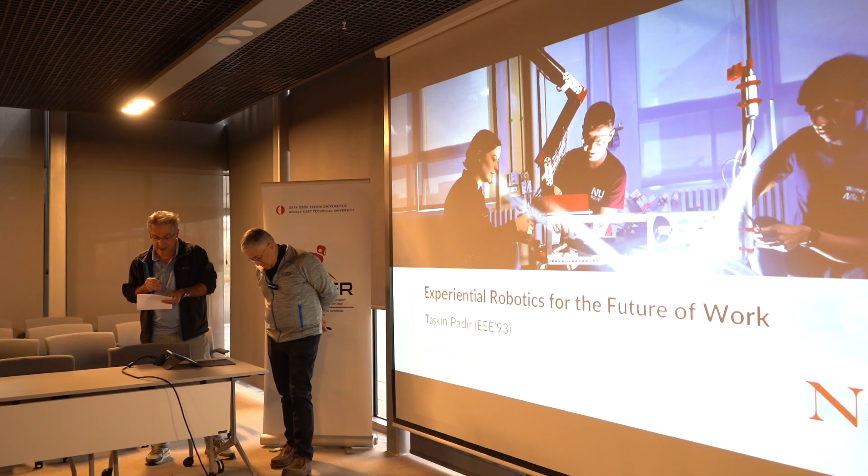Thank you so much, Errol. Sorry about the little hiccup we had before we started. This was long overdue. As Errol mentioned, I've been watching how ROMER was founded, and then it evolved, and it happened that I was around this week, and I'm delighted to be here and to talk about some of the work that we've done in the past decade and some. I also want to give you a projection to what I will be working on. Maybe that will inspire some new thoughts for you as well.

The title of the talk is Experiential Robotics for the Future of Work. As you age, your slides become more visuals, more videos, and your titles become more jazzy than technical, but I also have some deep dives that we want to go into.

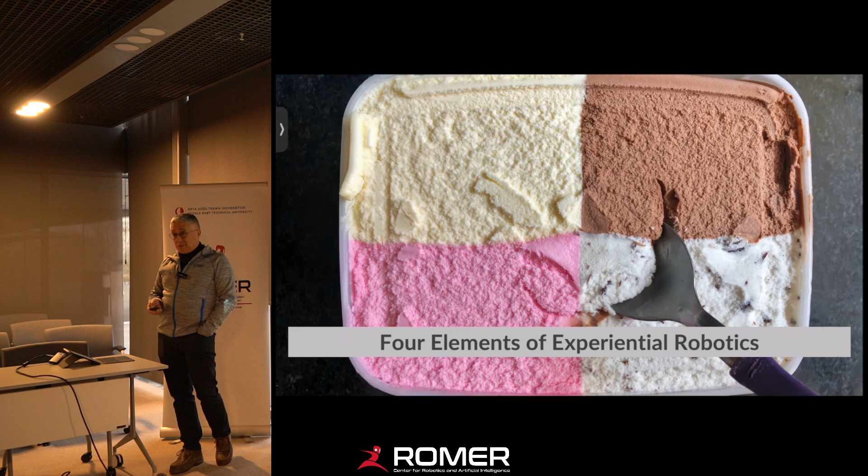Let me first address the elephant in the room. What is experiential robotics? This is a term that I've been using for more than 5 years now, and I describe it using 4 elements of experiential robotics. First, it's robotics to enhance human experiences at all aspects of life. We'll come back to some of the individuals that you see here, but whatever it takes, we design and develop robots to enhance human experiences. If a robot is not helpful for a human, why are we even working on it, right? So that's the first element of experiential robotics.

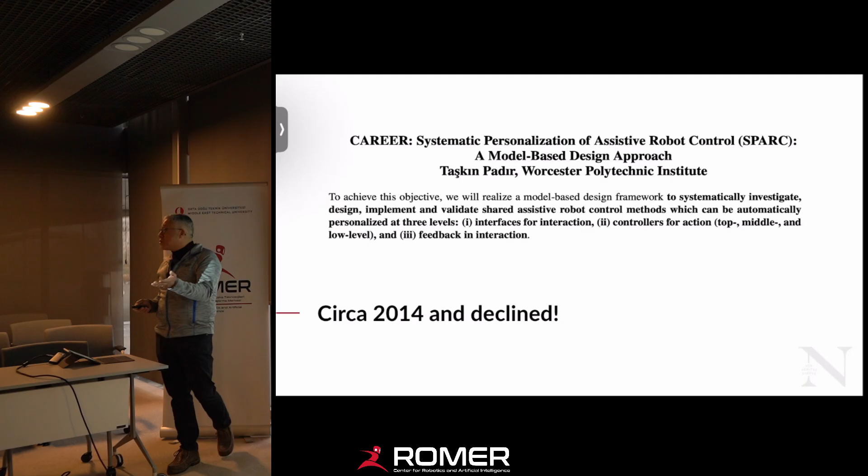The second element is you also see the age of the presenter if you put down your declined proposals on your slides, right? This was my career proposal to the National Science Foundation. I called it personalization of assistive robot control, about a little bit more than 10 years ago. The idea here was when you purchase your smartphone, the first thing you do is you start personalizing it, right? So there are no 2 phones that are exactly the same on the universe, in my opinion, correct? So we cannot design one robot that will fit all our needs, especially if we want to interact with those robots, if we want to collaborate with those robots, etc.

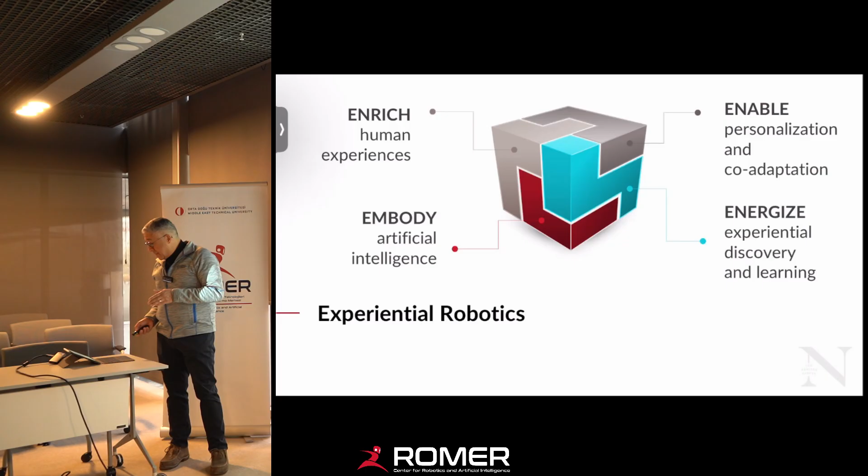Here's your summary. So experiential AI, experiential robotics, as a term I spun off again 5+ years ago. And then at Northeastern University, we launched our Institute for Experiential Robotics, very much similar to what ROMER is trying to do, providing an umbrella organization for our faculty, for our students. We have 5 areas of research that we put ourselves into, but at the center, how do we enrich the human experiences through meaningful deployment of robotics?

The first set of projects that I'm going to talk about, the title is Experiential Robotics for the Future of Work. So what is the future of work? Hopefully you'll get to see some of the elements. This is the CRISP project. We got this funded first from the Department of Defense in the U.S.

And then the National Science Foundation. In the U.S., you may not know this, there is a trade deficit in seafood, about $20 billion a year. So that means the U.S. buys more seafood than it sells, but that doesn't make sense because the U.S. is next to two big oceans.

There's Alaska where all the whitefish is caught. So when we dug deep into this problem, we realized that in Alaska, they catch metric tons of whitefish, it gets shipped to Asian countries for processing, they clean it, process it, and create these blocks of whitefish. Then the U.S. buys it back for McDonald's fish fillets and things like that. So that fish traveled far away and came back. It didn't make sense.

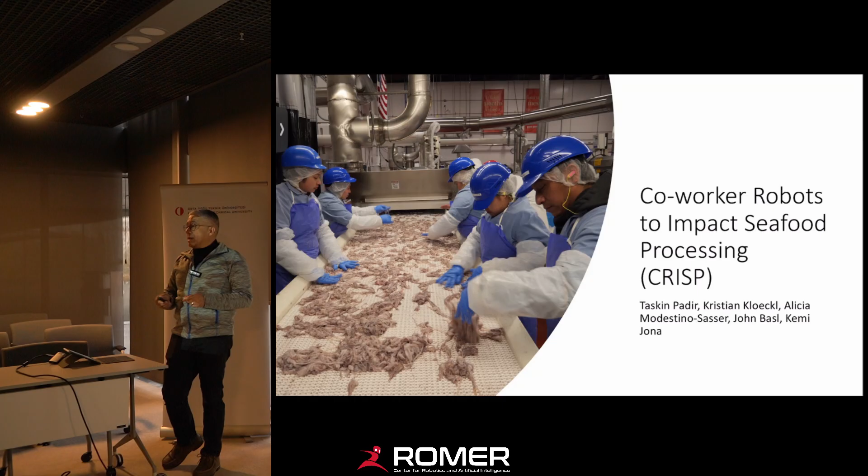So what we did was we took that problem and then we had a team. One thing I want to mention, I'm the only engineer in this team. We have an interaction design expert, a labor economics expert, an ethics expert, and a workforce development expert. Because in the U.S. you cannot just say we will introduce automation—everybody starts waving their hands asking, what about the jobs? So we had to look at the problem from all aspects.

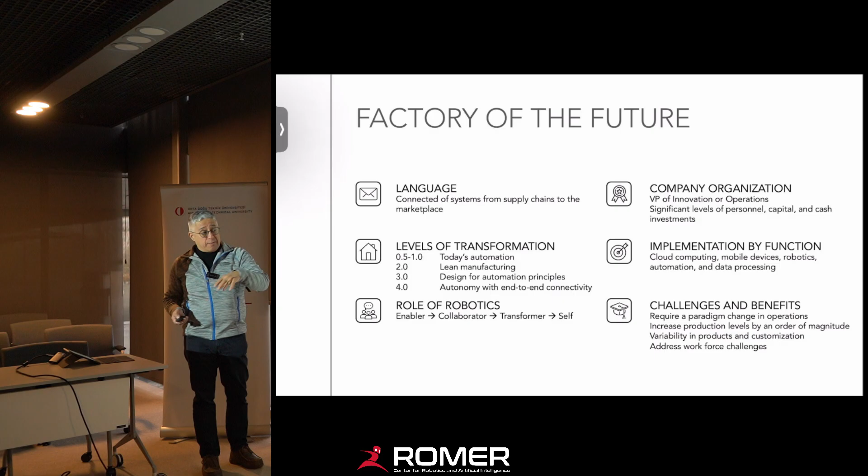We imagined this factory of the future. I don't want you to read the nitty-gritty details. This was during COVID, by the way, when we did this study. Things changed quite a bit at that point.

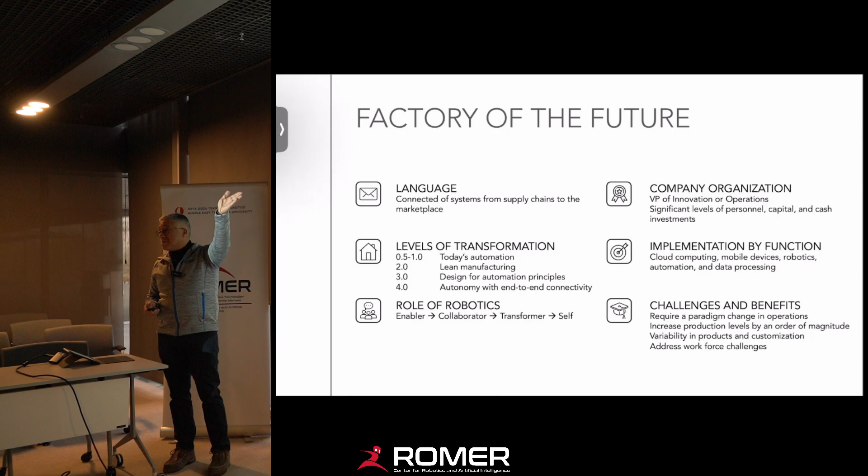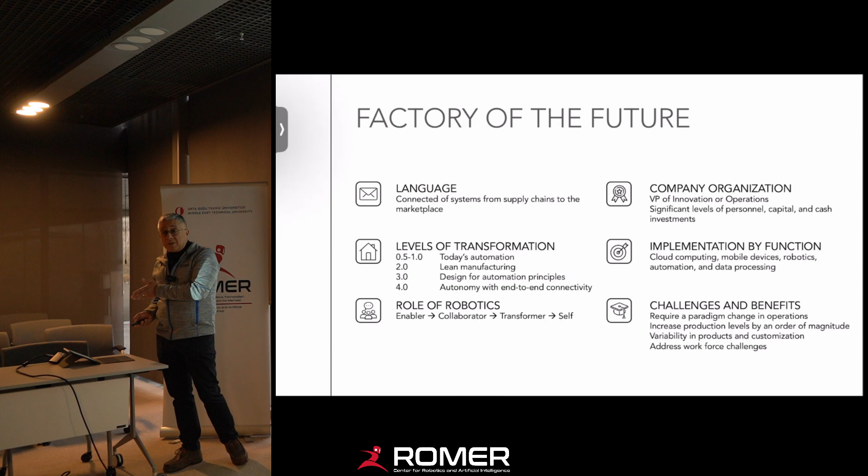One thing I want to point out is that we always talk about Industry 4.0, seafood Industry 4.0. We are probably right around this 1.0 level in many operations when it comes to these underserved industries. I'm sure if you go to any industrial region in Turkey, you'll find out that most of the things done there are very labor intensive—there's literally no technology. And in the U.S., one problem is the sustainability of operations because there's an aging population, and that one guy who knows how to do X is going to retire in the next 5 years, and then there's no one who knows how to do it.

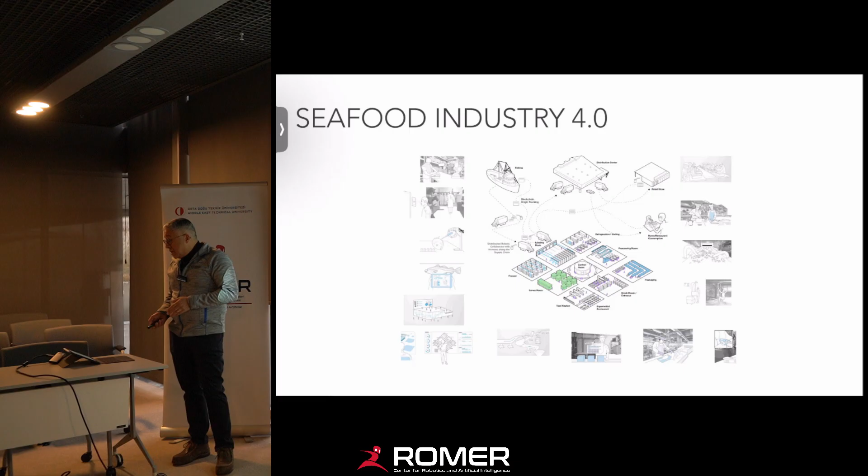So we created a roadmap, and then we saw things like this. I'll show you a few projects that we completed under this program. This is a seafood processing plant in Portland, Maine. It's a very small place. Workers all day long unbox these frozen fish, and then that frozen fish goes into a big machine where it gets defrosted just the right amount so they can process it, then freeze it and put it into market.

This is called added value, right? Sometimes added value is just portioning it because, guess what, Americans don't like to buy whole fish and clean it in their homes. They want to buy the little fillet and then process it. So then we asked the question, what can we do? This project we labeled 'productive inconvenience.' If your job is to move these 7.5 kilogram boxes all day long, you're prone to safety issues.

So you'll have injuries at the end of the day, the week, the month. So one idea is, can we introduce variability into the human-robot collaboration? That means you don't just go and pick up the box from the pallet—we have a collaborative robot arm that presents the box at a given region, but we played with that region. We said, okay, it can be assistive, right? Every one of us has our golden zone—I feel comfortable picking a box at this pose, but that also becomes a repetitive task, since I always go to that same location and position.

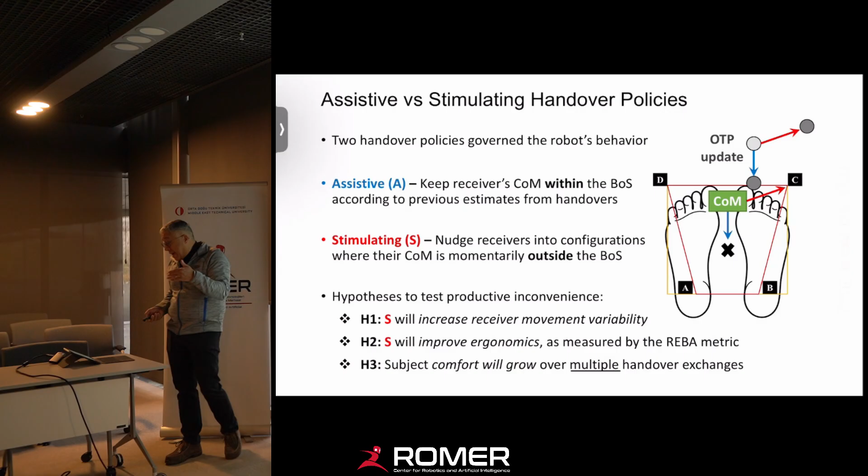So you're worrying—you have other worries. So this was, in a sense, asking can we introduce some stimulating motions for the workers so that they feel more engaged with the task, and then perhaps there's a path to minimize injuries. So we did this—again, during COVID, you can tell from my students, masks and all that.

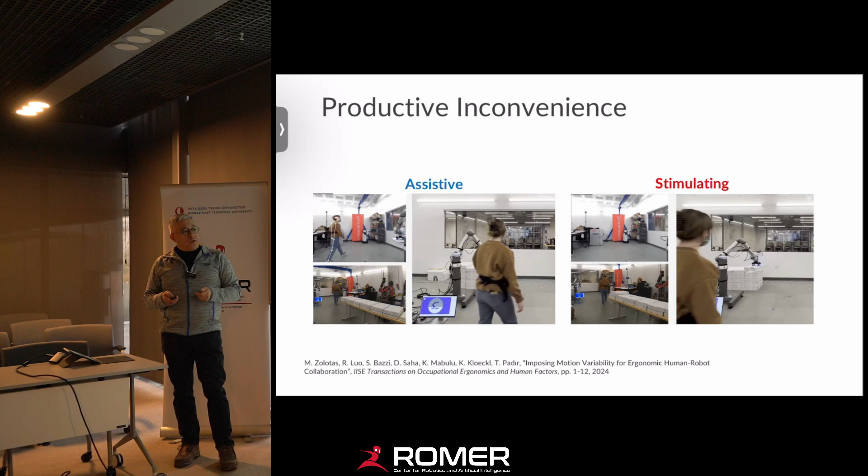During COVID, we completed this study, and then we looked at the assistive versus the stimulating conditions. Both videos look alike, but in the stimulating condition, we present the box outside of the polygon of support for the worker, so that person needs to do something a little different. In the other one, we track where the worker is standing and present the most ergonomic pose.

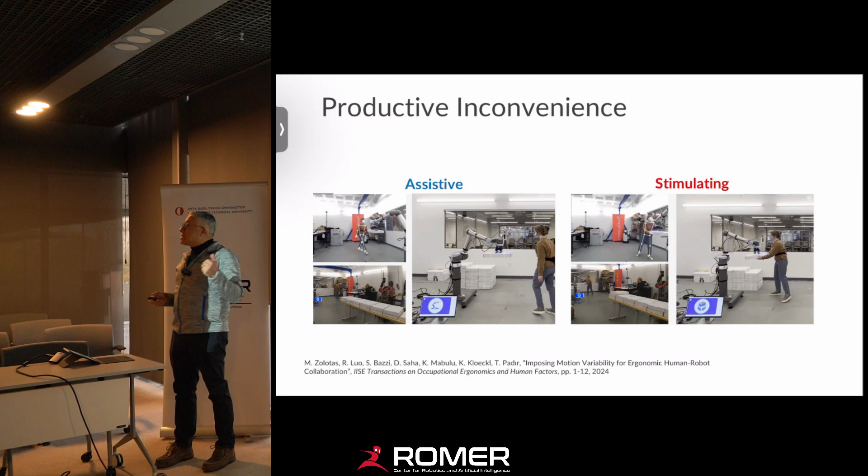I never thought during my PhD that I would write a paper in the Transactions on Occupational Ergonomics and Human Factors, but this is the power of multidisciplinary research. This is where we published this paper, and sure enough, our results from the human study showed that with the stimulating condition there were some advantages gained, and it was well received.

Okay, moving on. I'll bore you with seafood a little bit, but then we'll go into some of the other projects.

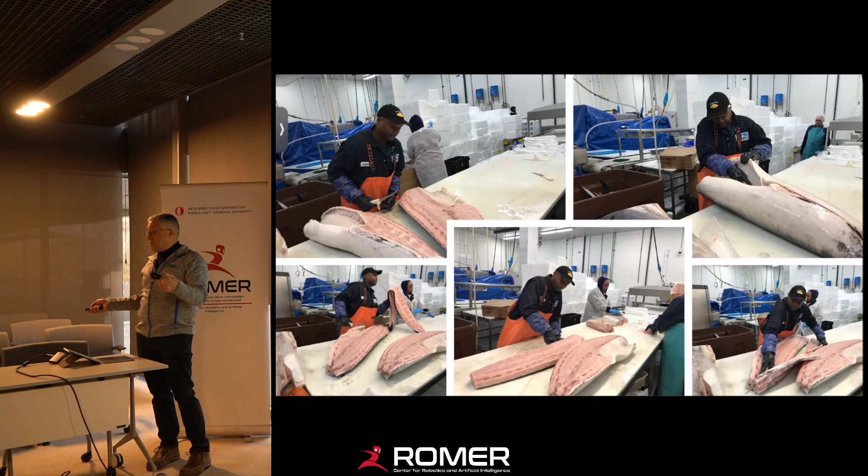We visited another place and saw this. This gentleman is pretty wealthy because he knows how to process a 275-pound swordfish or tuna fish. You may wonder, what about it? Every little bit of meat left on the bone or on the skin is waste from the company's perspective.

When these workers are trained—by the way, there aren't a lot of them—we heard, don't quote me on this, that it takes about 18 months for someone to get trained to do this right. There were only one or two people in the greater Boston area, and Boston is right on the ocean, so they cycle from company to company.

The idea here was, what if there was a robotic system around this—a coworker robot—not to replace this gentleman, because we know the challenges of robotics, but can we shave off a minute, 10 minutes, or half an hour through the collaboration? Can we help this worker do their job faster and quicker?

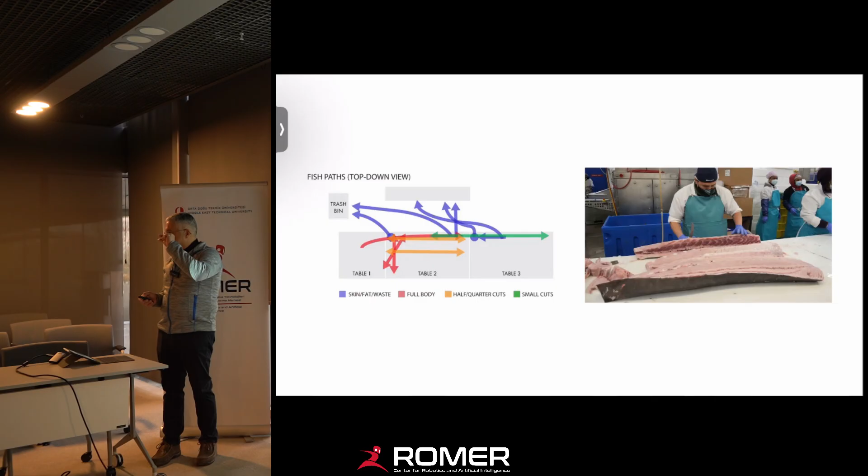So the interaction design piece came in. One of our experts looked at what they do—there are regions on the table, they first pull the big piece, make a big incision. I'm just giving you the idea, but we created a catalog of tasks: I push this big piece out, I'm done with this, it needs to go away. But every push, every touch is time on the worker's clock.

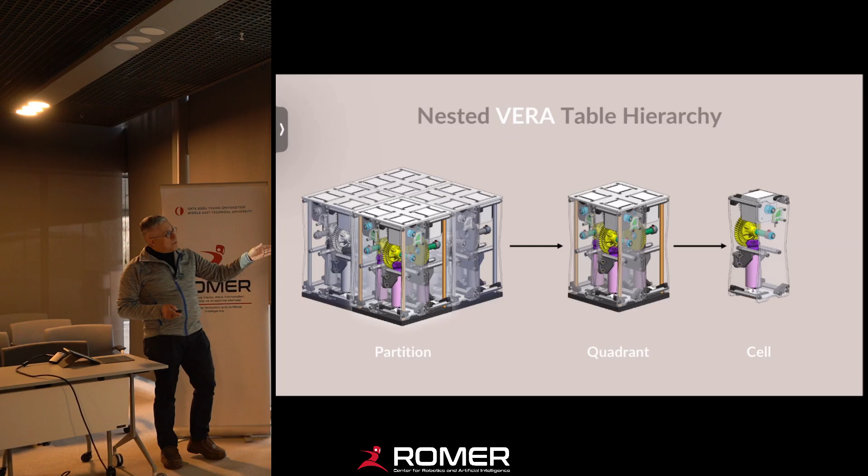So we said, what if there was a robot—not a robot arm, not a humanoid robot—what if the table itself is a robot? We created this concept of a voxel-enabled robotic assistant. Your tabletop is not a conveyor belt, because conveyor belts move in one dimension, maybe two, but you can't pack them into systems. In the prototype we did two 16-voxel tabletops, but it's modular, so you can go from 16s to 4s to 1s, in any form or shape.

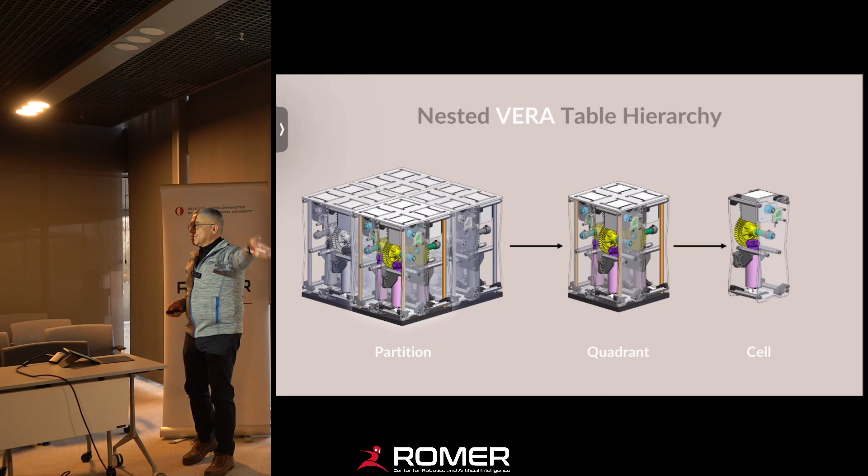We demonstrated that while I'm doing the cut, the important work, we can literally transport things on top of the table, on top of my workspace. So my workspace is my robot coworker, and we can take things away, bring things to you, as you focus on the most important thing. We published this at IROS last year, and like any other prototype, it now waits its time for refinement—how do we take this to the next level?

Part of our past work, with one PhD student—I always say no champion, no project, no exceptions, every PhD student comes in with an idea and we see what we can do. One of my students was very enthusiastic about hyperspectral imaging. We'd seen so much automation where there's a conveyor belt coming and workers looking for shells in scallops or shrimp, seeing if something doesn't fit.

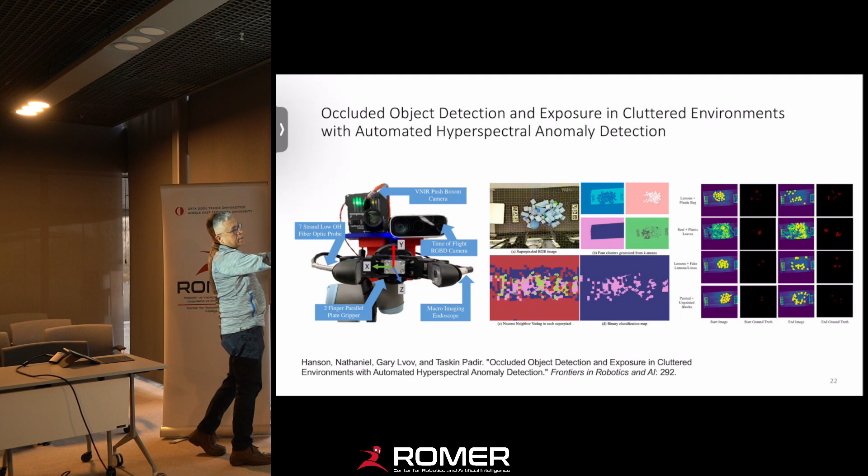So we created a gripper—more than the gripper, a sensing suite around it that can look at the workspace, not in the visible light spectrum, but in the invisible light spectrum. All of a sudden, all your anomalies light up. This was a quick way of demonstrating that if you're looking for something that doesn't fit with the product you're developing, perhaps you should look in the invisible light versus the visible light.

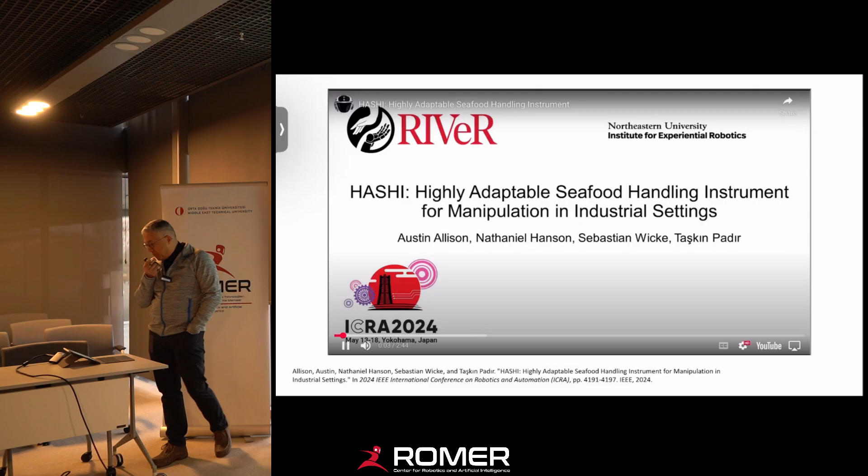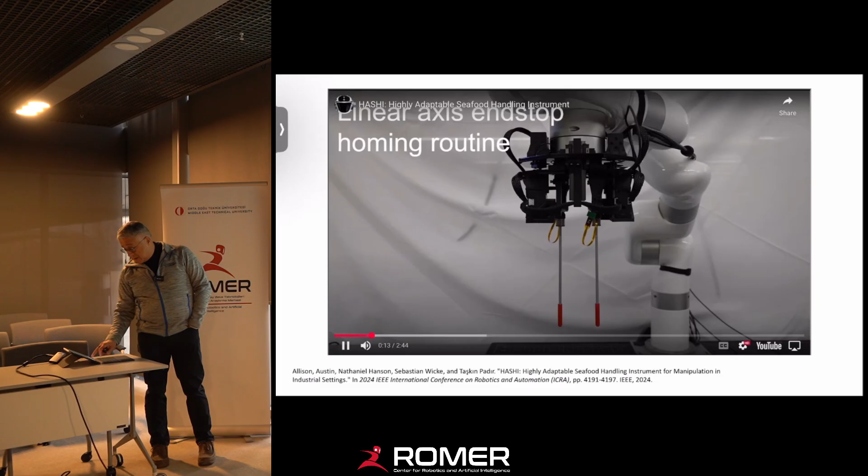One last piece on the seafood work, as we were coming to the end - is this running? It's running here but not running there. Well, you can look at it because this is on YouTube. We created a chopstick-inspired robot end effector.

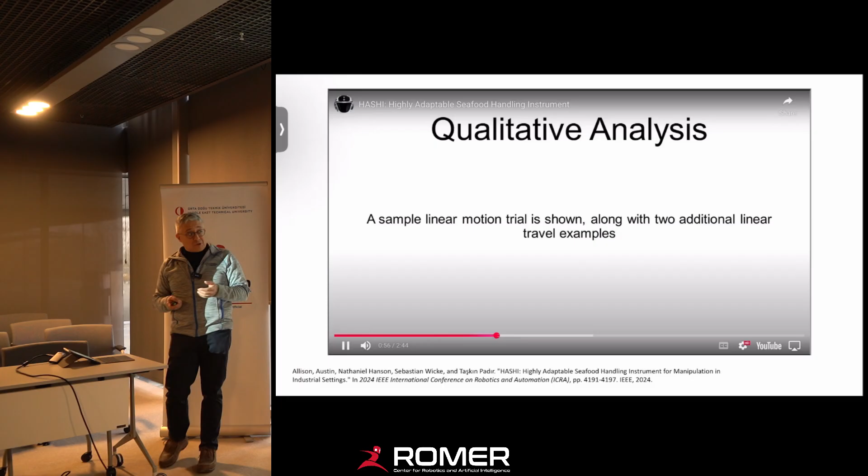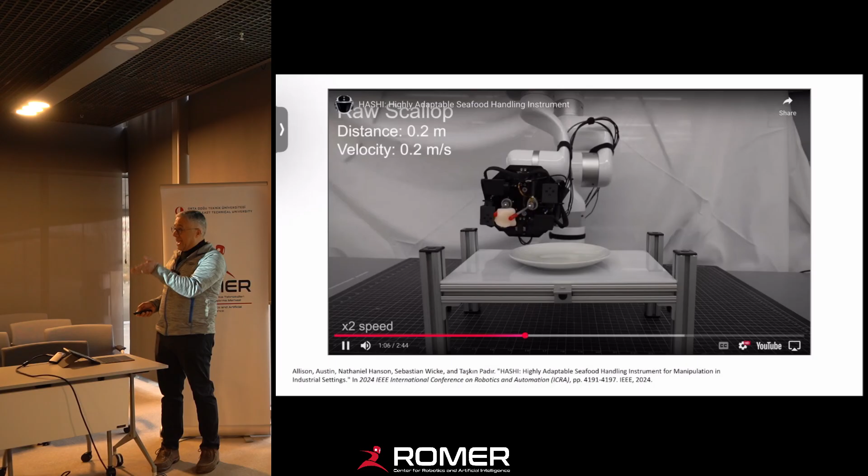If you're following what's happening in robotics these days, everyone is trying to build hands - there's maybe 50 companies trying to build dexterous robot hands. But we use tools with our hands. I'm not advocating that dexterous robot hands will use chopsticks, but if chopsticks are useful for something - by the way, for centuries chopsticks have been used for feeding, cooking, etc.

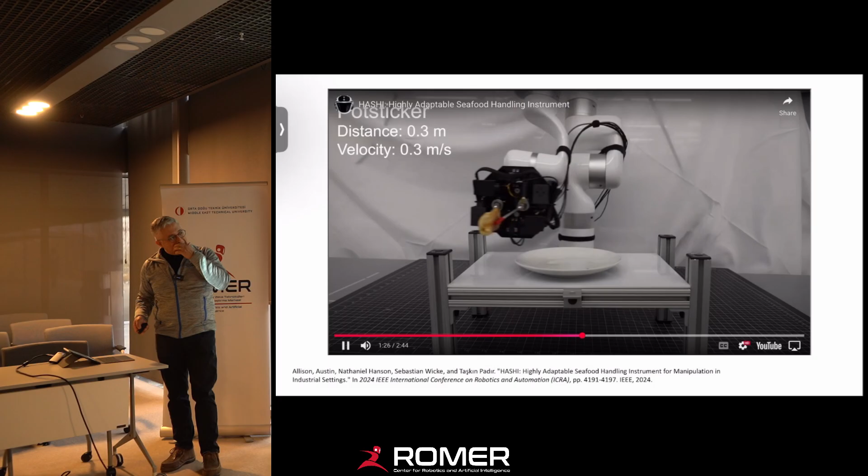The motivation for us here was - my video is running here beautifully, I'm watching it, but hopefully you'll visit the YouTube video. One thing we heard is that for top quality seafood, you're not supposed to touch it. So in the US, with scallops or really good quality seafood, you minimize the touch. So rather than hands, two tips perhaps is good for that purpose. So I'll pass on.

All right, so experiential robotics - I showed you a bunch of things we've done in the seafood industry. That project ended about a year or so ago, but now there's a new initiative, a very large consortium in New England, and we are one of the finalists for a substantial award from the National Science Foundation to translate all the research findings and outcomes we had.

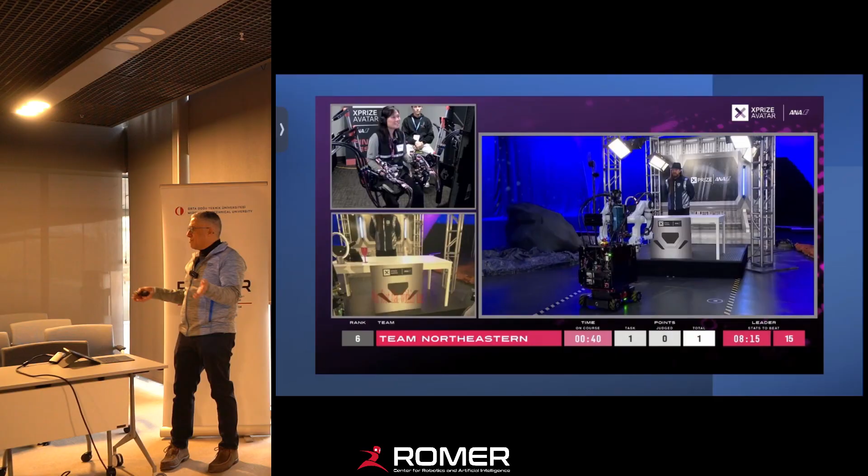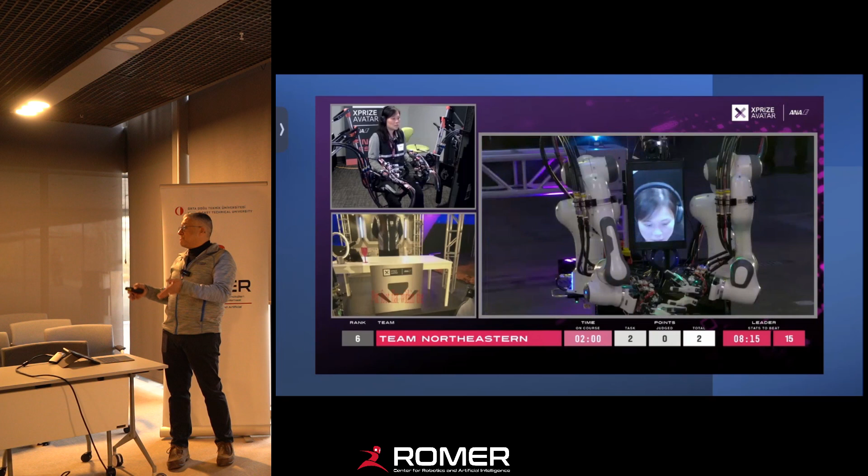You're working on your papers, working on manipulation, teleoperation, building actuators, robot hands, and so on. Right at the same time, XPRIZE - if you're familiar with the organization - had this space-themed avatars concept. The idea is it's not about the robot, but the robot is in between. It's a human to human interaction, or human to environment interaction.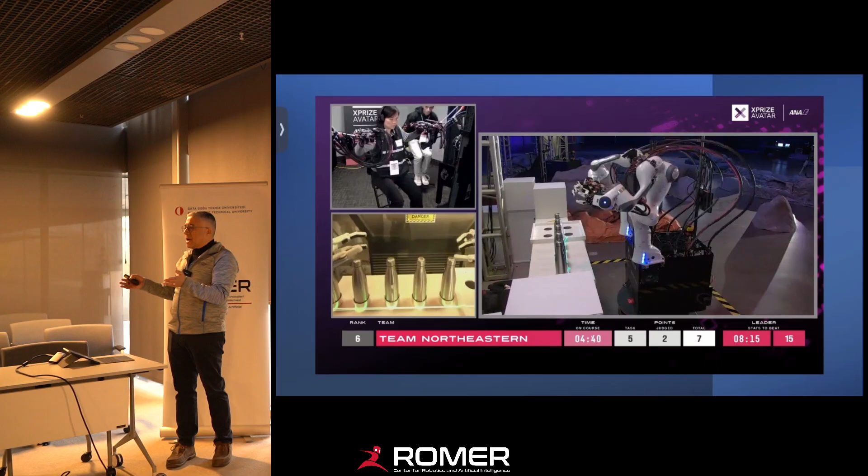The theme was space. Now it wasn't the first time this theme has been used - DARPA Robotics Challenge was the disaster response, and then NASA came in with the Valkyrie program, that was space exploration. But here, there's the space station where you got to do a bunch of tasks.

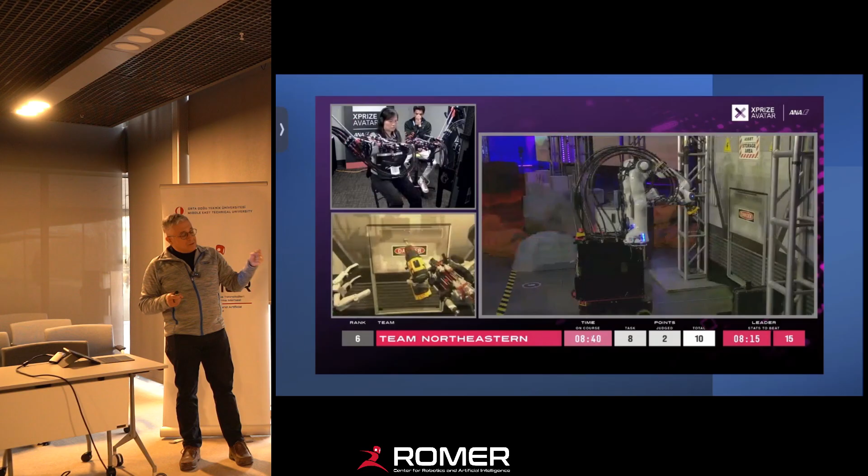The operator is a novice operator, so it's a judge, and we had only 30 minutes to train the judge on how to use the system. In this case, Peggy goes and utilizes the system to do things like grab a hand tool and then unscrew the screw, and more after this.

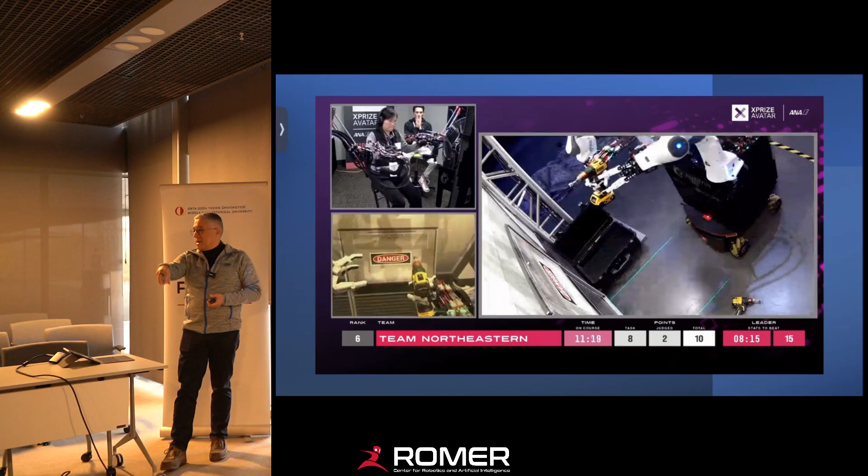You've seen I picked bottles, water bottles - they represent fuel, but one of them was full, the rest were empty. So find the heavy one and put it in, etc. The idea here is it's not just unidirectional teleoperation - there's bidirectional feedback, so you're providing haptic feedback to the operator.

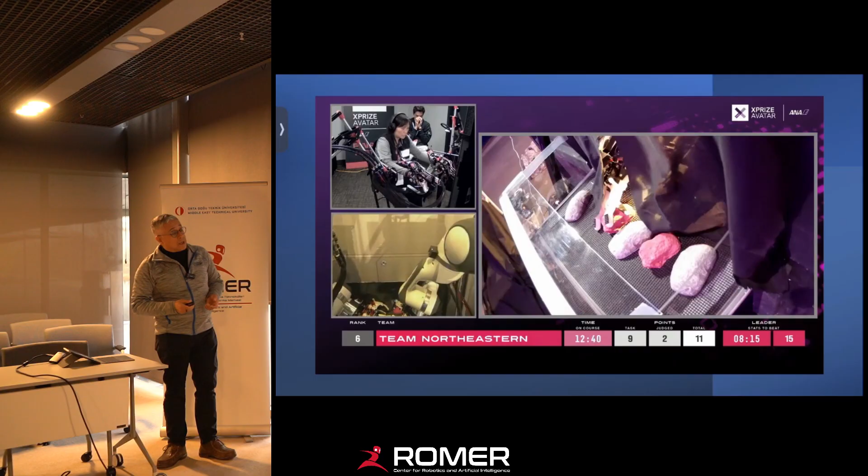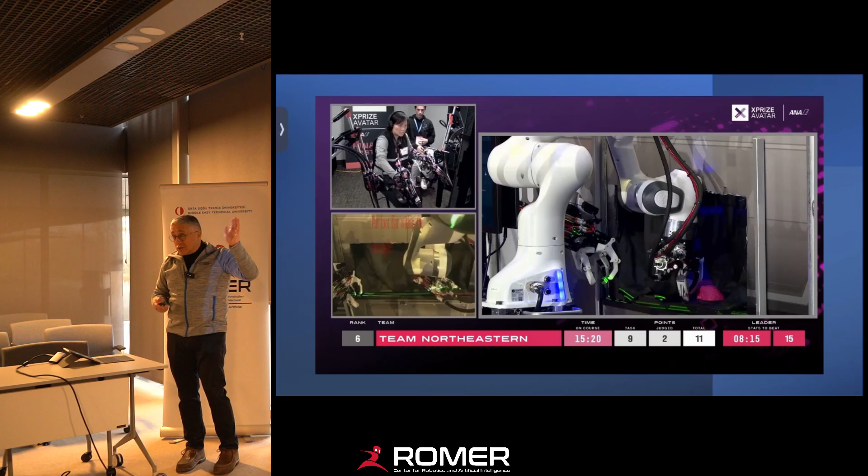Now this is where the video gets boring, because we spend almost 10 minutes reaching into that curtain and touching the rock with the rough surface and then pulling it. Somehow she kept pulling the curtain but not the rock. Eventually she did, and then here's what happened at the end.

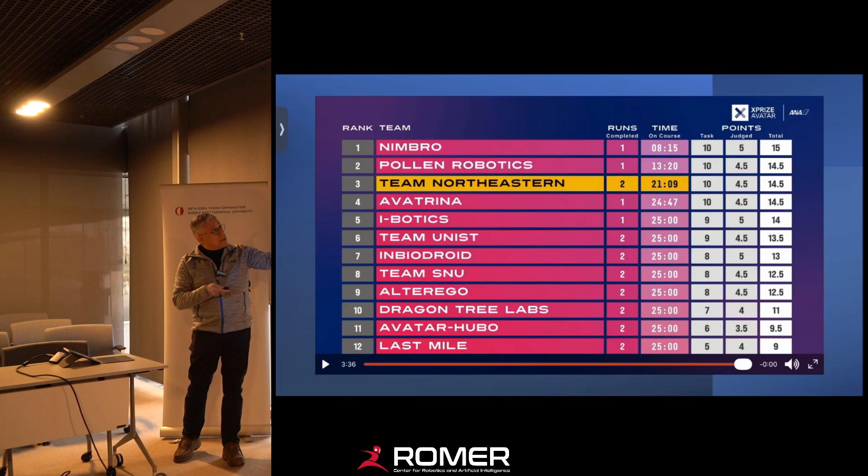We ranked third, the best team in the US. NimbRo was from Germany, Pollen Robotics is from France, and we came in third. Students were happy because they won $1 million out of this.

But I want to talk about why this is important. I'm not going to talk about DARPA Robotics Challenge itself - I'm going to talk a little bit about the NASA program we worked on. If you remember, DARPA Robotics Challenge finals were in 2015 - that's 10 years ago. Go back to the Urban Challenge, which was the self-driving cars.

10 years fast forward, we ended up with lots of self-driving car companies, then there was some down-selection, and now there are really a few strong ones deploying robotaxis in big cities in the US. So DARPA programs have this 10-year life cycle before something becomes really trendy. DARPA Robotics Challenge was about humanoids, with the Boston Dynamics Atlas that we worked on, and then NASA Valkyrie - and currently, oh boy, do we have a trend in humanoid robotics, in all forms and shapes, small or big, etc.

But everyone is pushing for full autonomy, while they are teleoperating their humanoids for data collection, for creating that foundation model for policy, etc.

Avatar X-Prize happened 5 years ago. My take on this, and maybe in a few years we meet again and you can keep me accountable on this claim. This is a claim, by the way: that in a few years we will see the advent of avatars to provide remote work, because we will have reliable hardware, but they won't be able to autonomously walk in and do all these great things at work. So there will be someone, maybe a one-to-many paradigm, but someone will supervise, guide, and help robots perform their job.

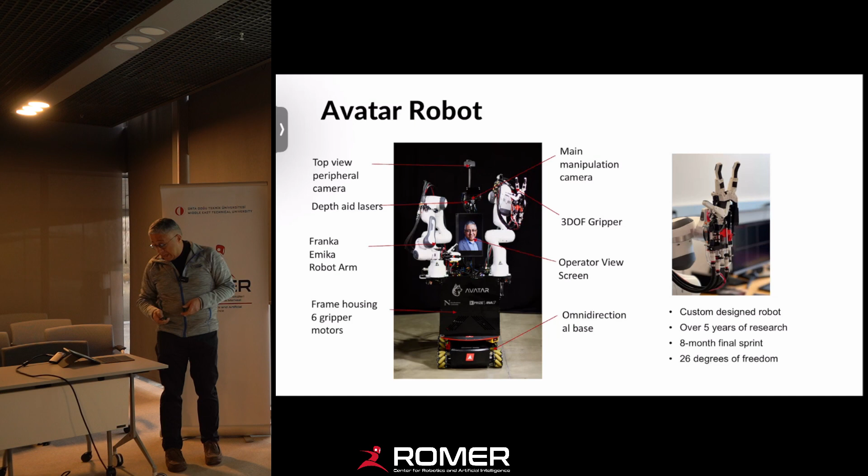Okay, so while I was speaking, I assume you read the slide. We had a very complex system, by the way. The reason was my collaborator, Professor Whitney, works on this hydraulic haptic system. It's something we all did when we were little: you have a piece of hose, fill it up with water, and whatever you apply here, you can feel it there, right? He has pressurized hydraulic lines which provide almost one-to-one haptic feedback to the operator.

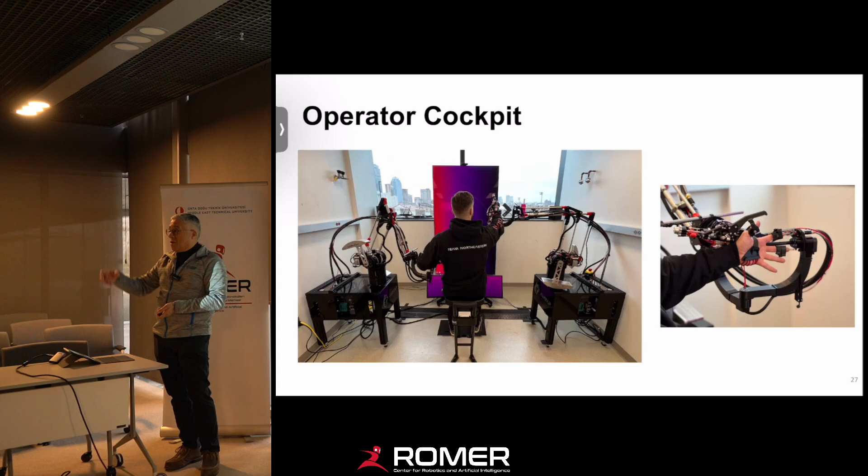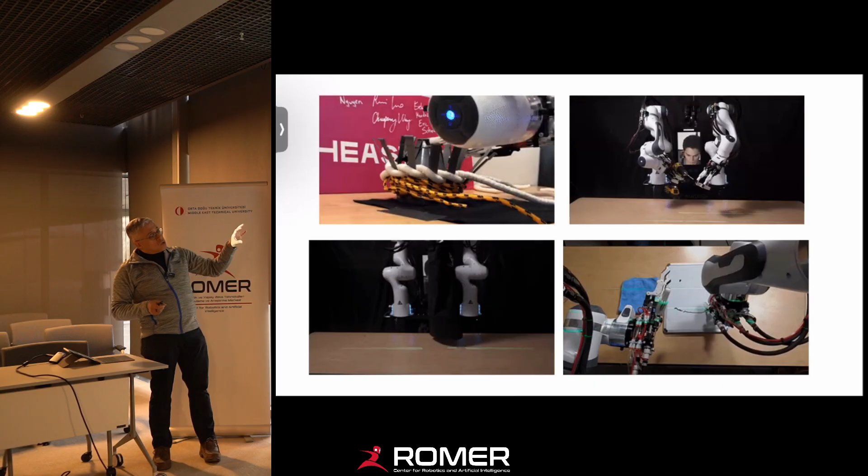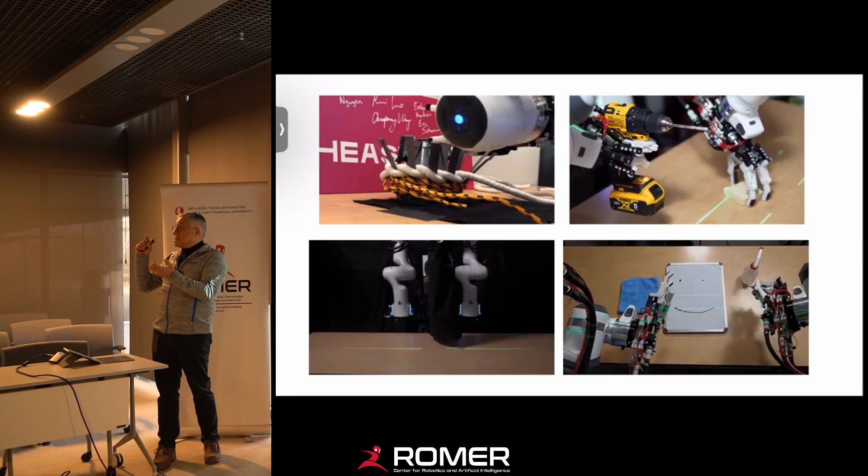That's how we were able to detect if this is heavy or if it's a rough rock versus another. I'll pass some of these, but I want to show through the avatars we were able to complete some really neat and complex tasks. This is pre the diffusion policy era, if you think about it. Diffusion policy came about a couple years ago, but we had this teleoperation system where we could complete these tasks and collect not only vision data but also haptic data, which in my opinion is very critical, because if you change the shape and size of this rope, that basket weaving task becomes totally different for the robot.

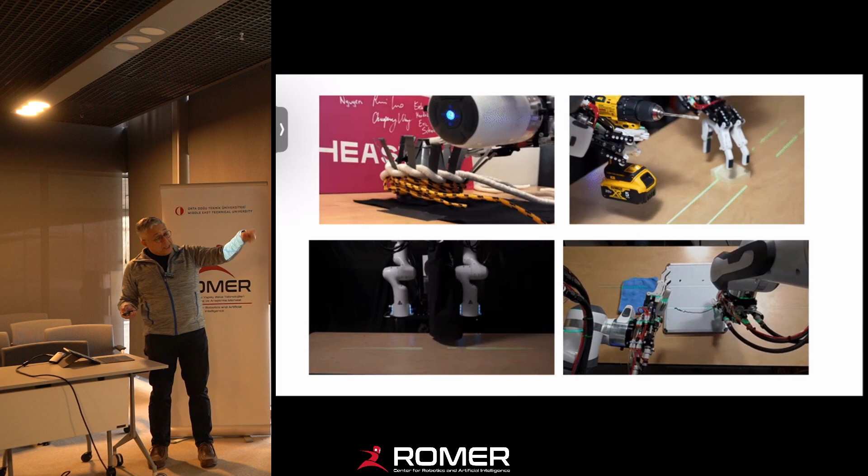I won't be able to show it today because it's fairly new. Peter completed a full upgrade of the system. We now have a modernized version of this avatar for data collection in the physical world for tasks like handling high consequence materials, etc.

In my opinion, avatars will come in handy not only in space exploration and manufacturing, but also in many health-related tasks. I think this is a worldwide global problem, that experts are not where you are. Your doctors, your medical experts are not where you are, meaning we got to provide them with tools to remotely provide care.

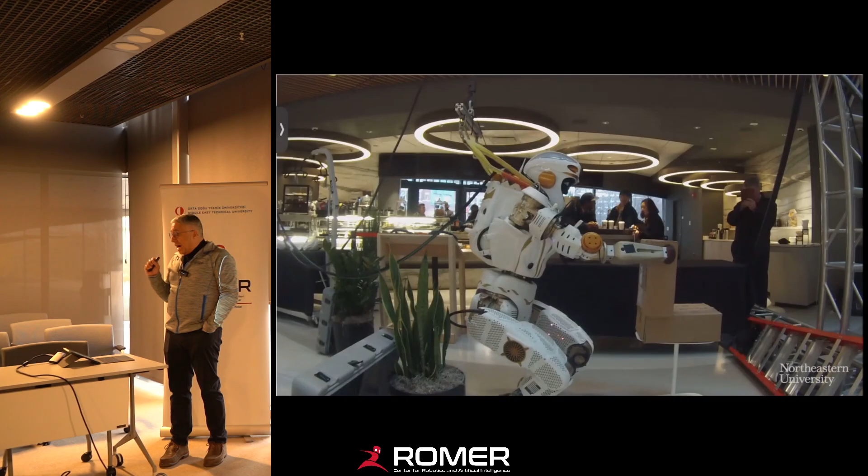I will quickly talk about this Valkyrie program because I want to show you -- again, I made the case that AI is good, but if it is meaningful, if it helps, it should be there. So I'll show you a number of projects where we use AI or machine learning.

This was a program that followed the DARPA Robotics Challenge. MIT and Northeastern received one of each of these robots, and I graduated 3 PhD students because it's a cool system. It's a highly complex system, and it was the best of its class, in my opinion, in terms of the hardware during the time we worked on it. We completed tasks like turning valves and picking up things, etc. It had dexterous hands, 4-fingered hands with tactile sensors. Really neat concept, really well built.

However, they were so fragile. Any time you make a lateral force contact, you break a tendon. I say this when we worked on Atlas, Boston Dynamics -- we bought a bucket and a mop into the lab because it's hydraulic, it leaks, right? So we were wiping oil from the floors. When we had the Valkyrie, we bought a sewing kit so we could fix the hands, so after a while it just became too much of a burden.

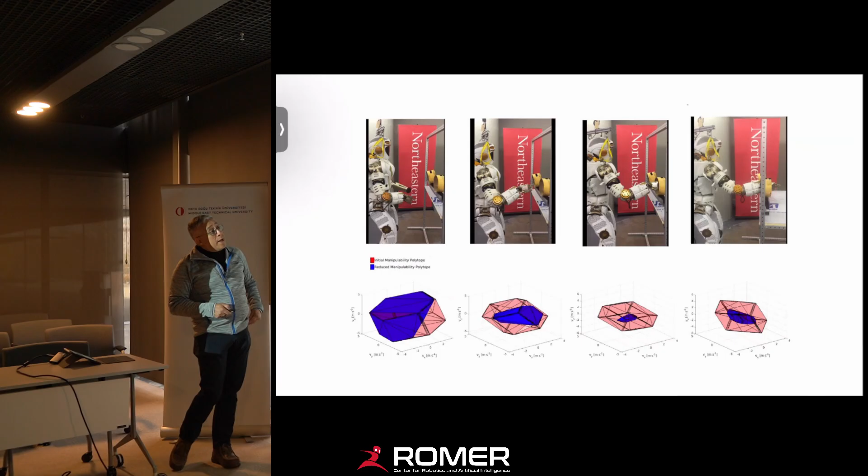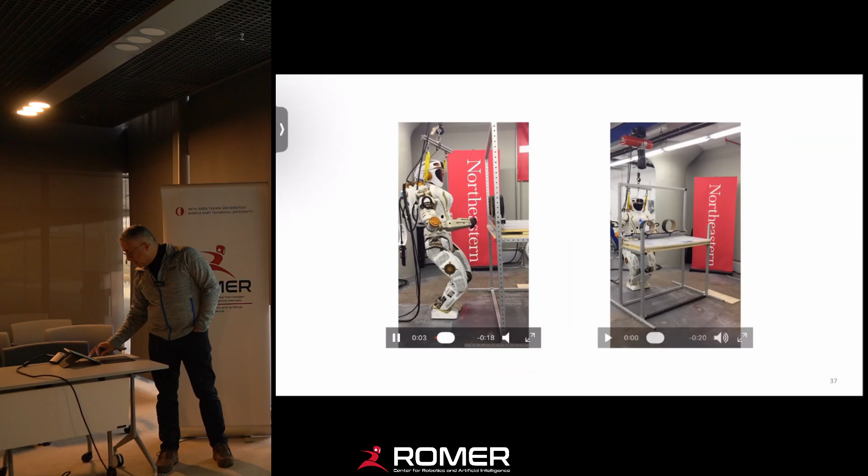Anyway, right at the same time, we also worked with the Department of Energy, where we looked at constrained motions, because the idea was, we have all this nuclear waste. The US has all this nuclear waste in old buildings, old facilities, and somebody has to go clean it up because it's a burden on the generations to come. In many of those facilities there are glove boxes, and those glove boxes are where you make the scientific experiments, right?

You put your arms in, etc. So my postdoc and my PhD student worked on how can we really design trajectories so that the robot at least can go in and then do certain things.

I want to go a little bit into detail, I didn't want to have just videos and pictures, some equations are on the way. So we created this contact trajectory optimization framework, which solved a non-convex, nonlinear problem through successive convexification.

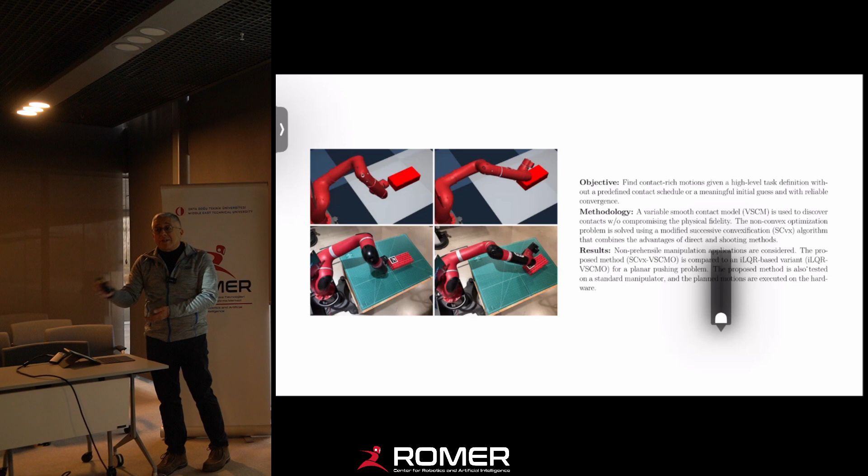The idea is we don't want to plan everything, right? Because I need to clear things. Sometimes we just push things, shovel things into big bags, if you're trying to clean up waste. The idea is there's no world where we should literally plan those things one by one.

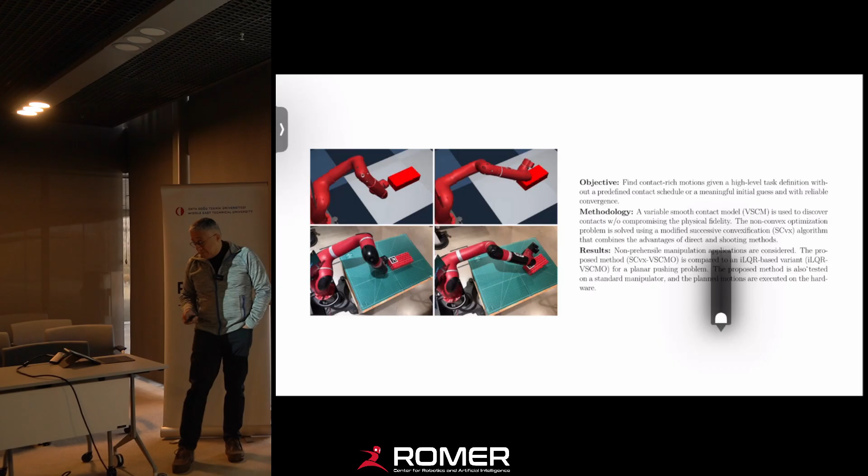Can we find contact-rich motions? You have a high-level task, clear the tabletop or empty the glove box, and then how can we achieve this? If you follow the literature, a lot of people work on pushing within the context of robotics. We are still working on pushing because it's hard for a number of reasons, and one is rigid contacts are challenging because you don't know how the objects will behave, so you cannot really model it.

So the first thing that we did was we created this contact model, published at IROS, and the idea there was it's a simulation, it's a model, but then using this, we created this contact implicit trajectory optimization.

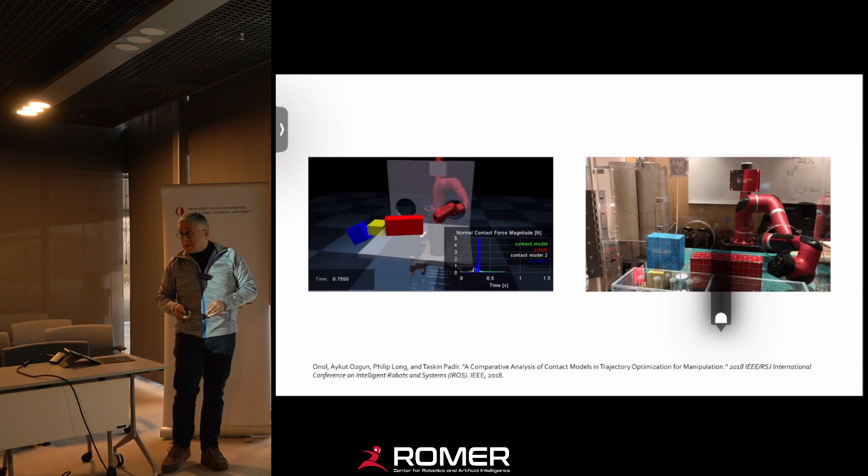What's happening is we are not telling the robot to push this red box at this point. The task is to kick the blue box. We bring the objects, we have the understanding of the scene, we bring the objects' dynamics into the model, and then the robot figures out where to make contact and how to create the trajectory so that it can complete the task.

So for those of you who are interested in robot dynamics, model-based robotics, we all know that our models are nonlinear. They are highly complex, and really we can deal with nonlinear models, but solving them real time while we are performing the tasks can become computationally challenging.

This idea of successive convexification was first proposed by Professor Açıkmeşe from University of Washington. He used this in the context of rockets, but this was the first work, my student used it within the context of manipulation. The idea is you can successively convexify, as the name implies, your problem by linearizing your models over a trajectory, and then you continuously solve for your trajectories, and voila, you achieve your results.

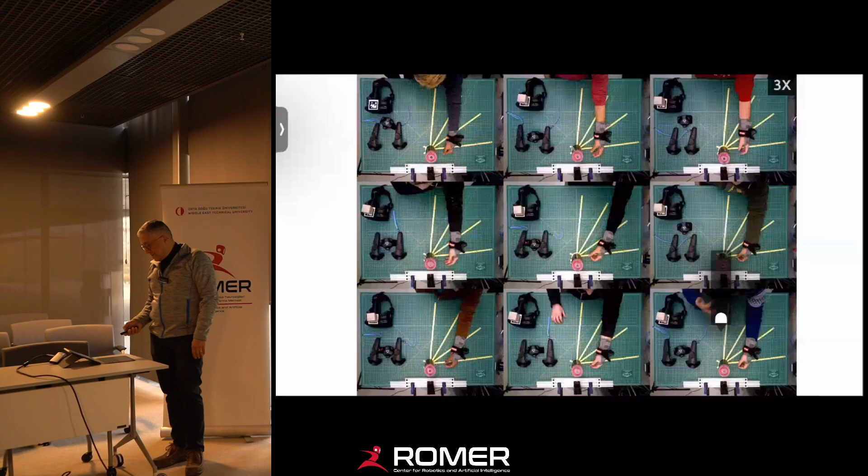I want to get to the next 5 years, because this is more for me actually, I want to motivate myself for the next 5 years and what I want to do.

Extremes, right? We use it. Oh my God, this is an extreme situation. So extremes this, extremes that. But then, with a few colleagues, we came up with a definition where we can operationalize it.

So here's what I mean. Extremes are high consequence operations, so there's a lot at stake. If you're putting a rover on the moon, it's a high consequence application, you don't want your rover to fail. Or, by the same token, if I want a robot to provide care to my mother, that's a high consequence operation that's inherently and unavoidably hazardous and occurs under harsh environmental conditions, such as a car accident, at the limits of human abilities.

One morning you wake up, you're happy, you're driving your self-driving vehicle, and your interactions will be different. But then if you're late to work, if you're late to a meeting and there's traffic, your interactions will be different. Human-robot teaming, and if you notice, I didn't say interaction. Teaming has two agents, human and the robot, so they need to co-adapt, or both.

Okay, so we defined this, but then we said, okay, a definition is a definition. What are some characteristics of an extreme? What are some of the knobs that we can turn up and down?

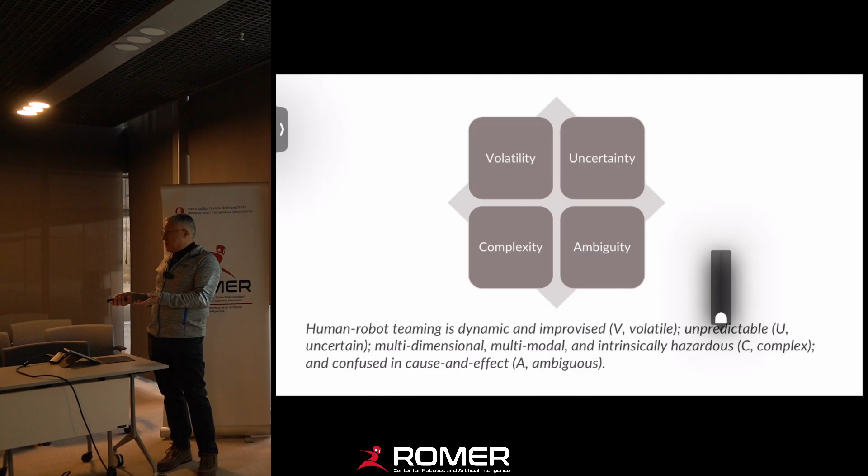So what I tell my students, and maybe this is a take-home message for some of you pursuing your programs: up these knobs. You don't have to do it all at once. You say, okay, I read this paper, they made this assumption, and by the way, they assume this band of uncertainty. What do I gain, or what can I do, if I allow more uncertainty? Or more interestingly, more dynamic and improvised?

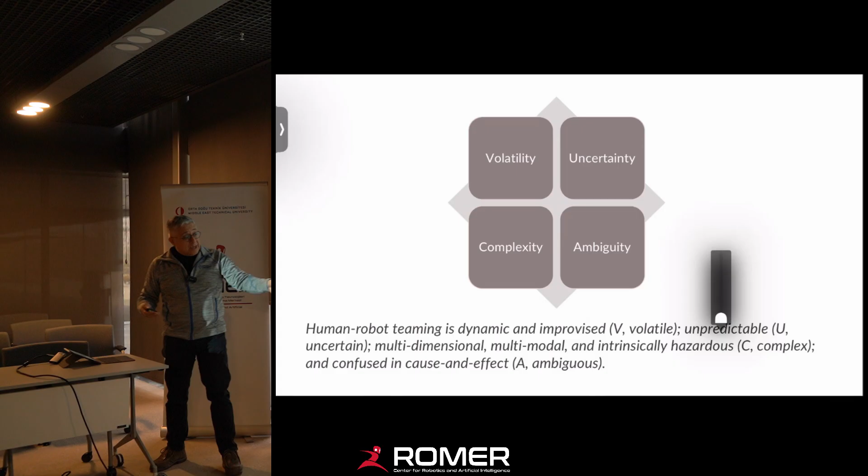So, volatility—if you don't believe me, Harvard Business Review has a paper on this, the VUCA guidelines and categories. Read it, it's an interesting read. No technical terms, but it has been guiding our research, and I think it's good.

In the next 5 years, I want to start from the end. I don't want to start on a problem where I solve, okay, if I do this I can get to this paper, if I do this I can get to that paper. No—I want to start from the end, meaning we want to solve a hard problem at the extremes. A firefighting robot in a car crash scene, right? So now roll back—what can we do? This is still far away, but work in the extremes. While you're working towards the extremes, you'll have discoveries, and probably they'll come faster.

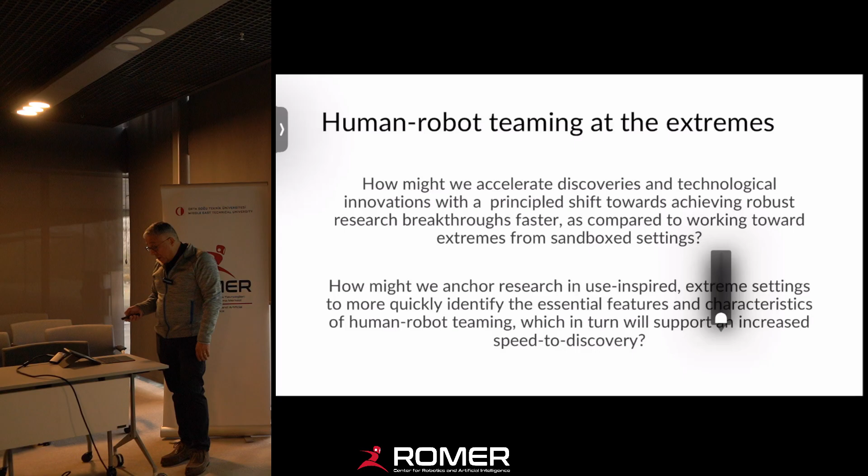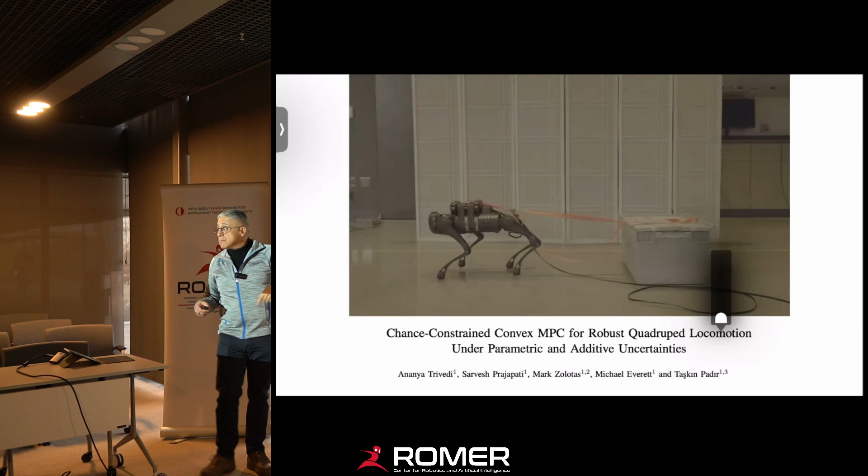I'll give you one or two examples given the time. This is our recently published RAL paper. It's a quadruped—there are plenty, but our spice here was uncertainty. Let's bump up the uncertainty. What did we do? We added 6 kg of weight onto the robot, and the robot didn't know about that—its model did not account for those 6 kilograms. We also moved the robot on uneven terrain, which the robot didn't know about.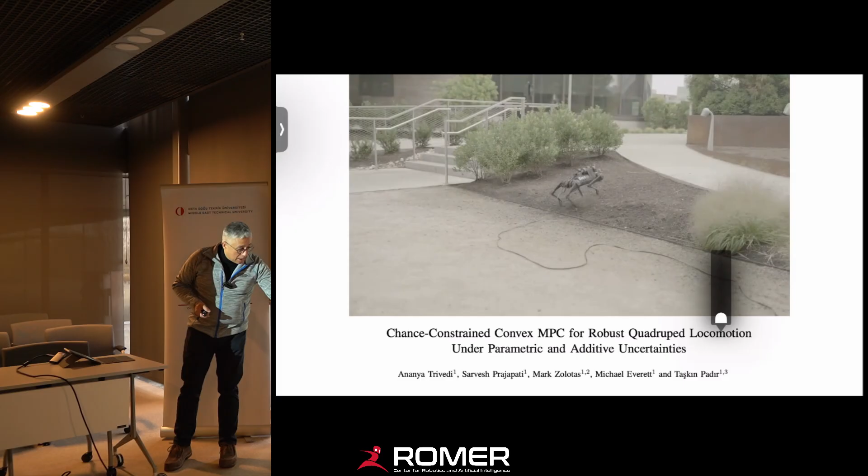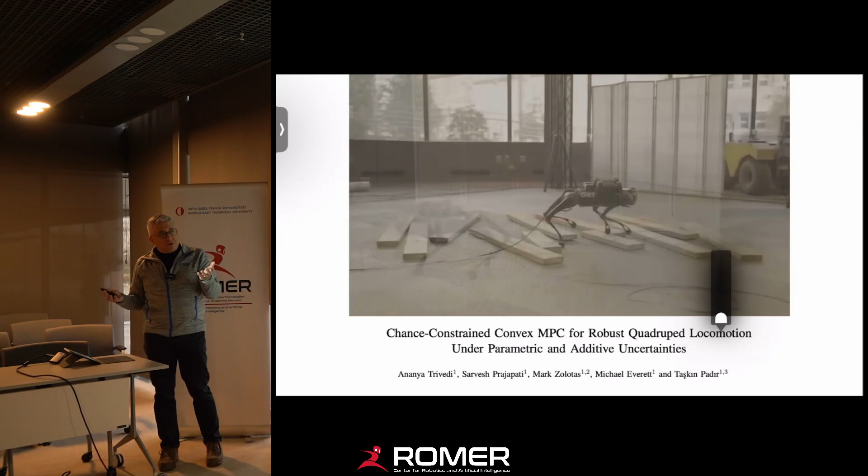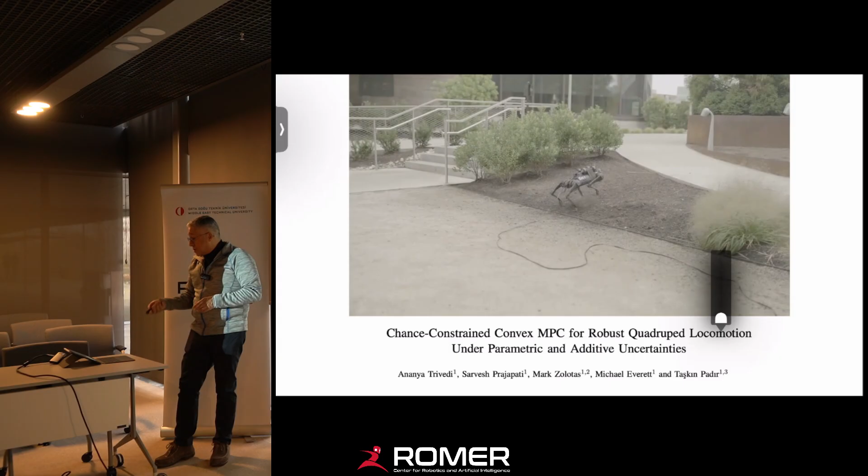What my students Ananya and Sarvesh did was ask: what matters? How do we provide stability and locomotion with the contacts with the ground? The robot has to take steps. You can plan steps, but if you have all these uncertainties and unknowns in your model, you're likely to fail. What they did was model the friction cone between the robot's feet and the surface using a chance-constrained convex MPC, adding the uncertainties at that friction cone. Again, you can solve this because it's a convex MPC problem.

You treat the robot as if it's a single mass, but in these demos, what's impressive—I just took a look at the paper, it just got published—is that we added significant weight, more than 50% of the robot's own weight, so that it can still go.

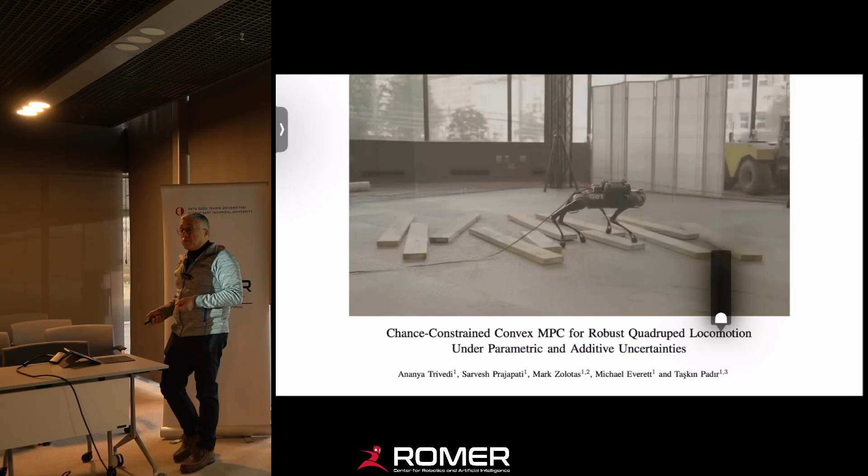This is not going to run, so I'm going to pass.

One other thing is we just completed the full fitting of our off-road vehicle. This is a full-size ATV that can be human-driven or autonomous. There's an autonomy stack and an advanced sensing system, which I talked about a little bit—we used hyperspectral imaging and created an outdoor version of it. We've published quite a bit of papers on this.

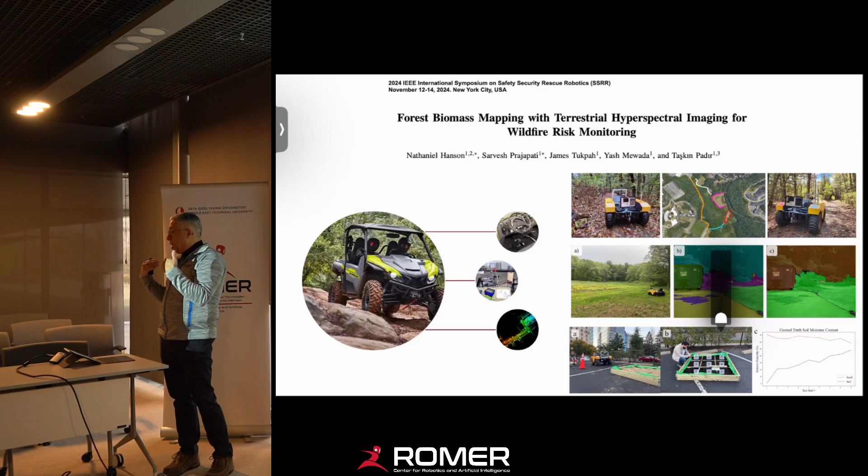But how do you know if you're going to sink or if you can go through? Usually you don't know until you're already in there and in trouble. So in our latest RAL paper, published a couple months ago, we trained a model to look at mud. In those test boxes there's soil, but we adjusted the water level so one is muddier than the other. We trained a machine learning algorithm to look at the scene. Your RGB camera just sees mud, but your hyperspectral camera can pick up that this is 50% water content versus 10%. That allows us to decide whether we can traverse or not.

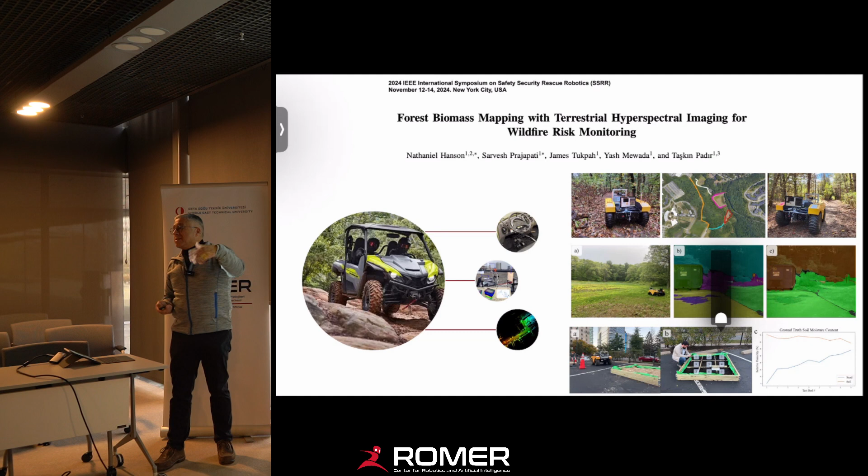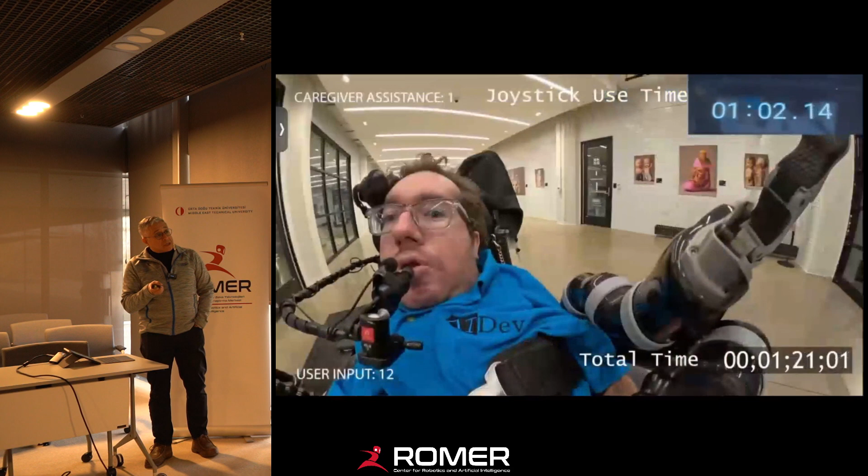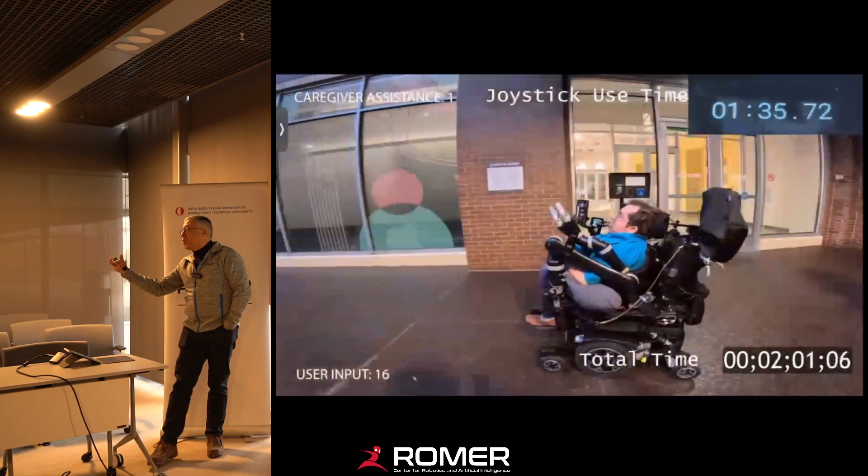Okay, last piece, and to me the greatest. I did work on smart wheelchairs and smart robot arms 15 years ago, my very first National Science Foundation project. This is Owen, one of our collaborators, filmed this video in Pittsburgh earlier this month. The University of Pittsburgh just secured large funding from ARPA-H, which is NIH's equivalent of DARPA. ARPA stands for Advanced Research Projects Agency, and H is for Health. The idea is that for the next 5 years we'll work on RAMP, a robotic assistance, mobility and manipulation platform, to provide independence for individuals with disabilities.

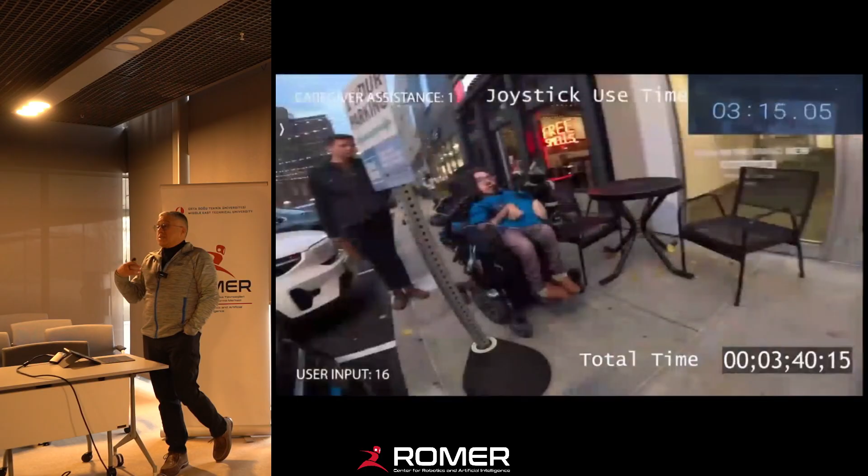But don't think of disability only as physical or cognitive. As we age, I may need a platform that takes me from my apartment to the corner store to buy groceries and back home. I might be pretty mobile inside my home, but coming down 11 flights to the first floor, getting to the market, and coming back up may be too much. So can we have a system that provides this?

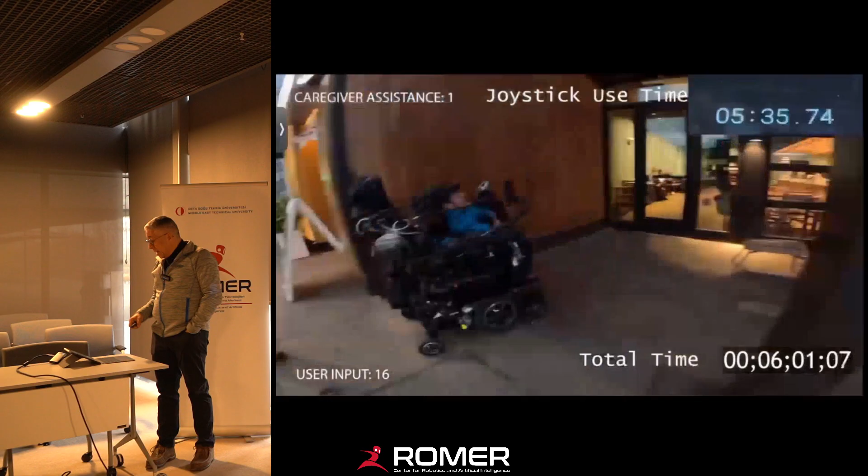What you're seeing now is our very first demonstration, which we'll present in May. Owen is pretty tech savvy, as you can tell. He has one of these Kinova arms and can teleoperate it through his personalized interaction devices. The idea is to interact with the environment, push accessibility buttons, get to the Starbucks, pick up your drink, and come back home. This is a 4x sped-up video; it actually takes about 8 minutes for him to do this, over a distance of maybe 200 meters.

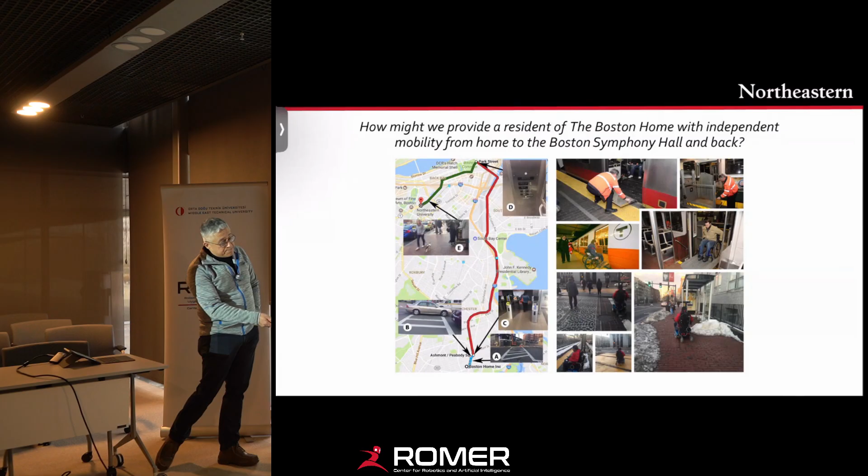One thing you saw was caregiver assistance needed 1 time. Our goal is to take this as the baseline, the current state of the art, what he can do right now, and figure out how to cut down the time. Everyone wants to get their coffee as quickly as possible, with the goal of making that assistance count zero. Can we provide full independence? I've had this long vision of bringing individuals with disabilities through the metro system to wherever they want to go. This funding will help unlock that vision.

My group specifically is part of a very large team, 8 institutions total, 5 universities and 3 companies. The companies handle tech development and hardware while we work on the algorithms. My team will specifically focus on indoor and outdoor navigation. But how can you provide safety? Safety is critical, especially on a sidewalk, making sure the wheelchair doesn't go over the curb, and so on. This is where the embodied AI piece comes in, because you need something repeatable.

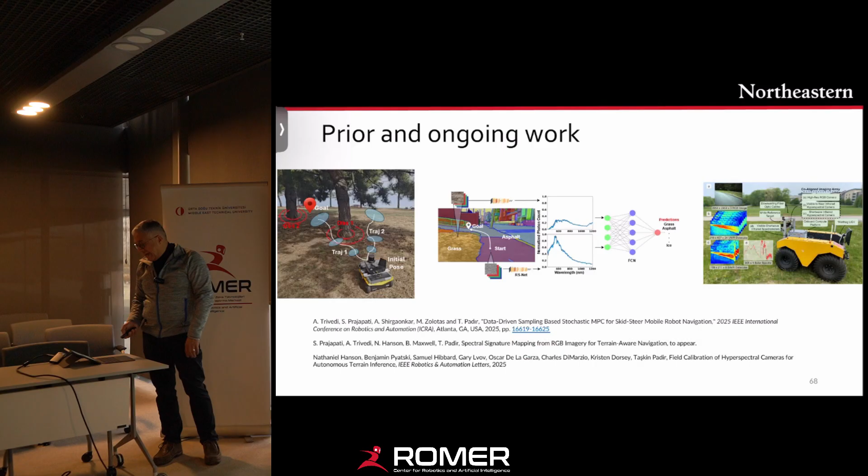I'm going to pass this. This is prior work, and there's a ton of other supporting work, but I want to make sure I have time for questions. I'll leave this here. If you ask, I'll tell you what I'm doing for Amazon. But otherwise, I'll stop here and we can come back to it.

I want to thank all my students. Of the upper pack, 14 of them graduated and none picked academia, they all picked industry. They're all working for the big AI and robotics companies these days. I still have about 9 or 10, maybe 15, incoming and active students. We've gotten a lot of funding from government and industry. So, thank you.